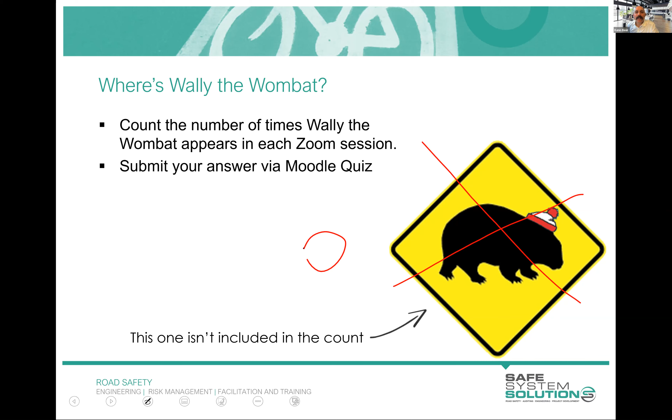Oh, sorry Max, go ahead. Oh yeah, I was just going to confirm for anyone thinking that maybe you can have this running in the background, and when you come to the quiz question you can just flick through your presentation notes that we provided on the USB - you won't find Wally in the presentation we provided you in the PDF. You only see Wally in today's presentation. So that's another way we've tried to make sure we keep people engaged. So make sure you're counting.

Thanks, Max. Yes, and another way we try to keep you engaged is by incentivizing you with chances to win prizes. We have lots of different prizes available if you're the first to answer questions correctly that we ask through the chat. If you ask really wonderful questions or make great comments through the chat, you're a chance to win a prize. Also, if you log into modules a little bit early, you're a chance to win a prize, because we do a little bit of trivia before each session, just in the few minutes before. So it incentivizes people to log in early, just some trivia.

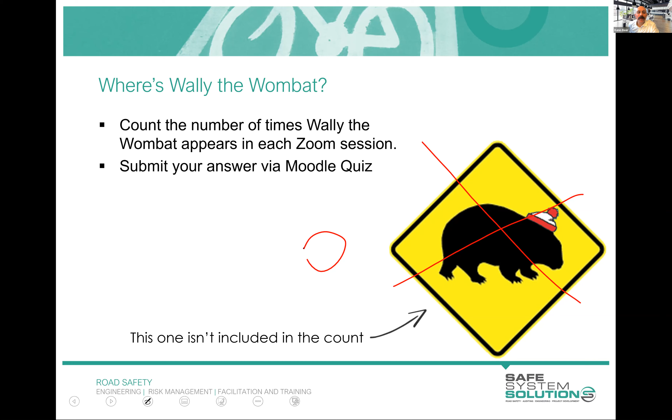And you might be asking yourself, well, how do I get these prizes? Well, at the end of the session, if you successfully complete everything, you'll get a certificate electronically, but you'll also get a certificate in the mail. And if you've collected any prizes along the way, in that pack will come whatever prizes you've won. The prizes are a whole variety of exciting things like socks and hammers - oh, we've stopped mailing hammers, they're too expensive to send - but all sorts of exciting stuff.

There is a competency benchmark for this course. We set a benchmark requirement, which is to attend and view all the sessions. We strongly encourage you to come to the live ones, complete all the set tasks, and the pass mark is 80%. But I wouldn't get too concerned about that, because both Max and I, our objective is to ensure your competency levels are up to that 80% pass mark, and we will help you and coach you one-on-one and do whatever's required to bring your competency level up to that.

You have 3 attempts at everything. I suggest what you do is have a first crack at it. If you really bomb out and don't do well, then get in contact with us and we'll organise a one-on-one Zoom chat or phone conversation.

At any point throughout the course, you are more than welcome to contact us via email or phone and ask questions about the assignment. We really do encourage that. That's the one big downside of not being face-to-face, it's harder for us to check in that you understand and you're comfortable with it. So please do reach out if you're confused at all. We are here to help you through this journey.

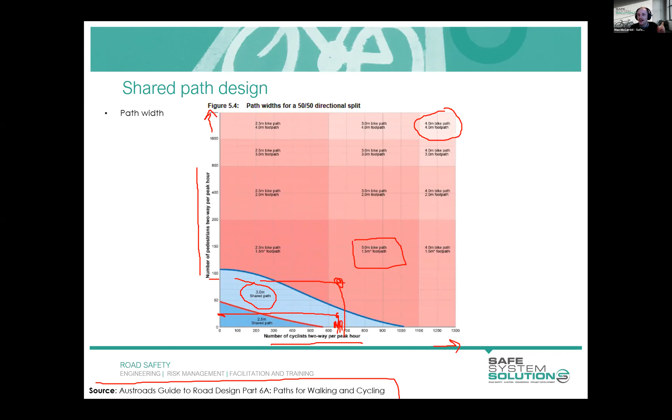As you're rising up the chart, as we're getting higher and higher ped numbers and cyclist numbers, what you're looking at is actually providing separate cyclist facilities and separate pedestrian facilities. Similar to that photo I showed in the last slide, where here's where the cyclists go, here's where the pedestrians go. If you've got high volumes of both road users within the space, then separating those two road users is considered best practice. That's the real takeaway from this graph.

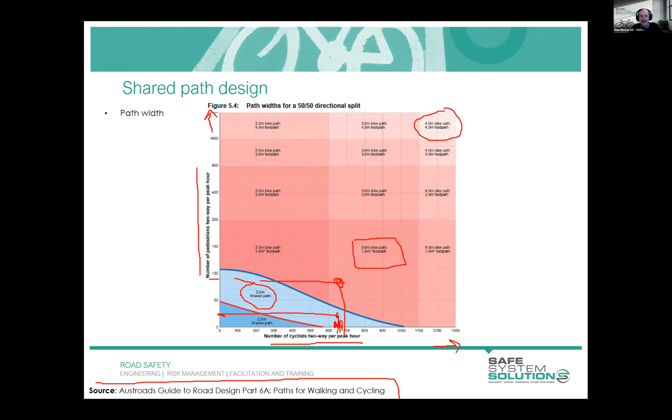You've got to take it with a grain of salt, a pinch of salt with these things, because they're trying to illustrate a point. But if you've got 701 cyclists per peak hour, does that shift things from a shared path to a separated facility? There will be some professional judgment required.

Another common way path widths are determined is in terms of the actual strategic function the cycling corridor is providing. For instance, if it's a local access path, shown here on the left-hand side, a range between 2 and 3 meters is suggested as appropriate.

These regional paths, also commonly referred to as commuter paths, have more of a let's-get-cyclists-here function. They're connecting corridors and connecting destinations. They typically have wider paths, so a range between 2.5 and 4 meters, with a desirable minimum width of 3 meters, which is generally the benchmark for shared use paths. You've got a lot more activity happening there with cyclists and to some extent pedestrians.

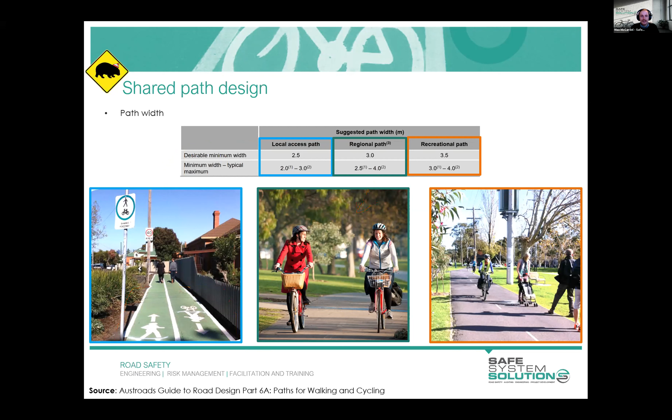Typically the first thing people consider with gradient is, if you're a cyclist like me and you don't like uphill gradients, this is probably the graph that's most relevant—desirable uphill gradients for ease of cycling. What it's saying is there are two curves: an acceptable level and a desirable level that can be provided within this space. As the gradient increases, the length of your gradient decreases, because you see that curve going down.

In other words, if you're providing a really steep incline, like a 10% incline, you only want to be doing that for about 10 meters before that facility is basically going to be unused, or only used by those that are incredibly fit and love doing this stuff—a bit of a mountain junkie. That's who will be most attracted to that shared path facility.

However, if you are providing shared paths, you're most likely catering for cyclists aged between 8 and 80—a common phrase I'll probably continue using throughout these modules. But if you're aiming for cyclists within that range, their ability to tackle these really steep gradients is very, very limited. So that's what this graph is trying to illustrate.

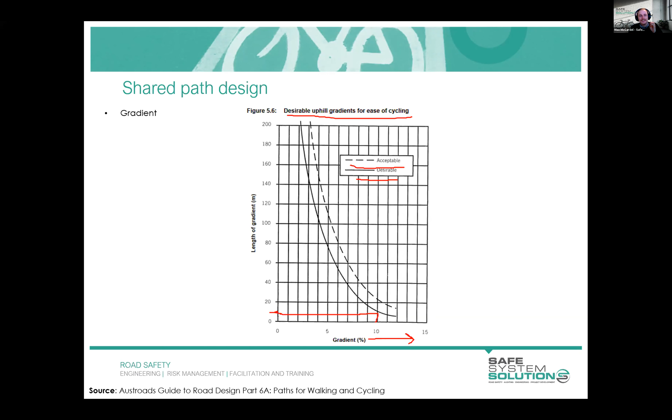Another interesting facet about gradient is in reverse. When we talk about downhill, which isn't always considered as intrinsically as uphill—because uphill you can understand why that's more challenging for a cyclist to pedal up—downhill gradients typically steeper than 5% should not be provided unless it's unavoidable, as the phrase is used in the Austroads guide.

So the issue with this downhill gradient is you, as a cyclist—and I'm sure anyone that's been on the saddle would love to just go for it down this hill—will easily reach 40, 50 kilometers per hour by the bottom, and that's without pedaling, just enjoying good old fashioned gravity doing its work. But the issue is with a cyclist coming in at that crossing point, interacting with the shared path: their ability to see you coming down that hill, and your ability to see them entering your shared path, is incredibly limited.

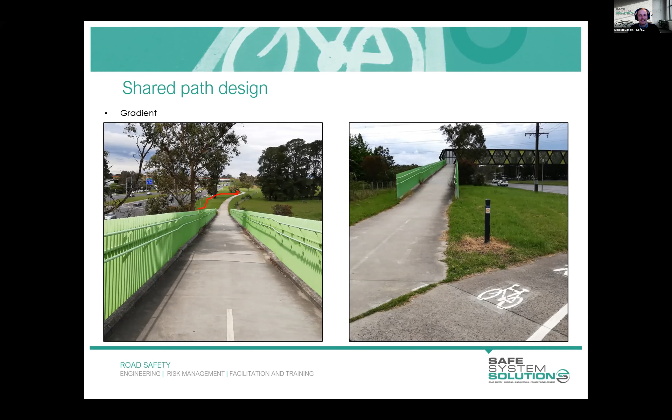I'll keep hopping through. Are there any other questions there, Ken? No, that's it for now, but do keep them coming in, everybody, please.

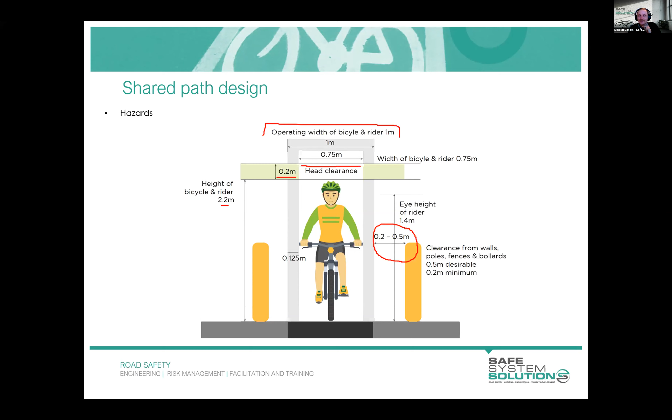Sorry, Ken, yeah, go for it. Oh no, I was just going to say, speaking of mountain bikes there, Andy's just popped in the sort of different widths of handlebars of different bikes. Certainly some mountain bikes have quite wide handlebars, and I ride a very compact handlebar setup on my bike. So those widths, they're sort of taking into account a bit of that range, are they?

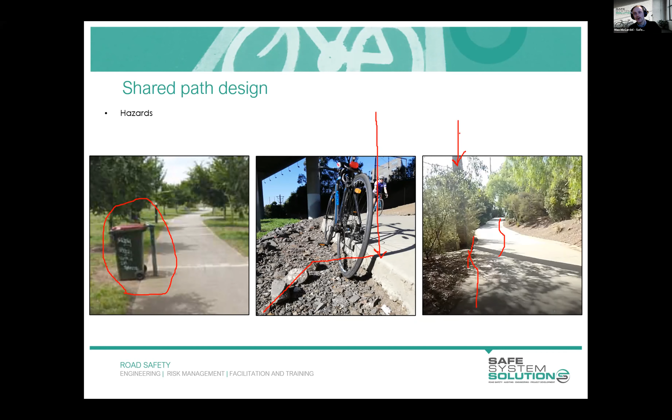Although you can see it, and if I point it out you'd think how could a cyclist ever hit that, there are plenty of instances where you as a cyclist are forced to weave in and out or undertake emergency swerving. So it does happen. Here's an example of what this delineation could look like to avoid a hazard.

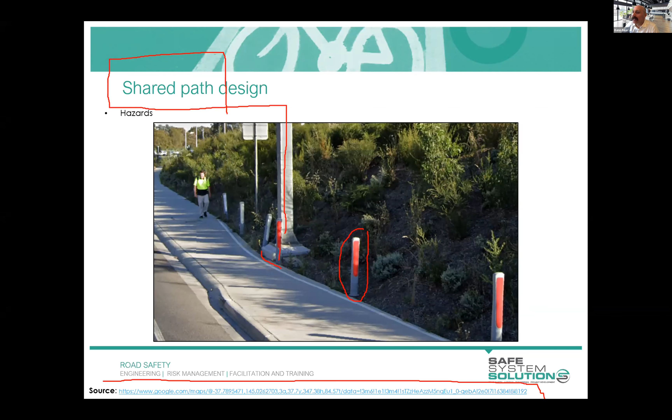What do we got coming in now? I think we need some sort of barrier system potentially, lots of stuff coming in now to redirect cyclists away from the hazard, especially if they're out of control or avoiding something. So potentially some approved cycle fencing. Can the gantry base be protected? It wouldn't stop them hitting it, but maybe reduce the severity, so some cushioning there.

I'm just reading. Maybe make some comments on those, and I'll keep reading other ones, because this group is excellent, Max. Lots of ideas and thoughts coming in. I'm struggling to keep up with my reading.

I love it. It's good to hear the use of the term cycle-friendly fencing. We will discuss that later on in this presentation. Good to hear that jargon's already been embedded in some of the participants here, because that's certainly an option within this space. If rather than just providing flexible bollards, you provide some type of fencing there, you're more likely to hit the fence, which has got a much improved crash outcome. You hopefully just slide against the fence and continue on your journey, rather than hitting that fixed column, which would hurt a lot if you were to run into that.

So any other answers there, Ken? Well, yeah, a few good thought-provoking comments, which I really like here. So one from Sam talking about the people designing, building, maintaining, managing, and doing the temporary traffic management, everything like that - have they actually ridden this? Are they people who ride and understand some of these challenges? And if they did, they might alter their thinking. So that's a good one.

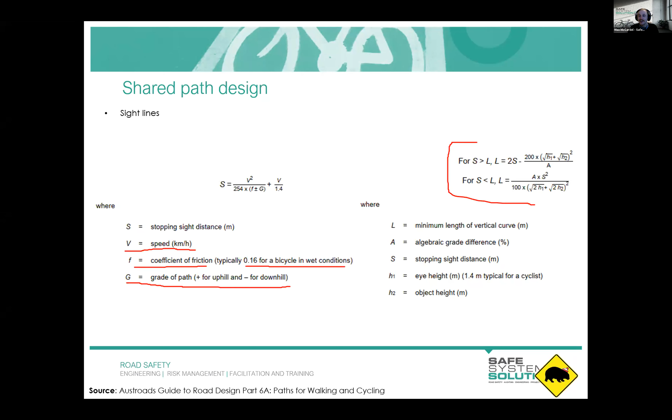There's also more equations here if you want to get into some finer details of whether you'll be able to stop if you sight that hazard in time, or whether you're going to collide with it. So there's plenty of research out there if you're interested in seeing whether what you're proposing is going to be a hazard to the cyclist, or whether there's sufficient sighting distance.

The one I wanted to discuss is horizontal curves, because it's not always thought about in this space. A really common example is providing vegetation at the side of the shared path. But if you're providing that along a curve, that vegetation can grow in size over the years, and it can be a real hazard for cyclists because you already can't see beyond the curve, and you're introducing this bushy obstruction that blocks your line of sight. You're potentially creating a point in the future where cyclists can't see, and if there's a hazard there, that could be an issue.

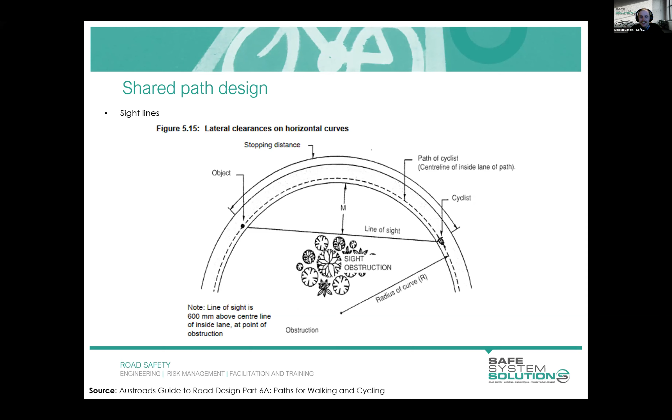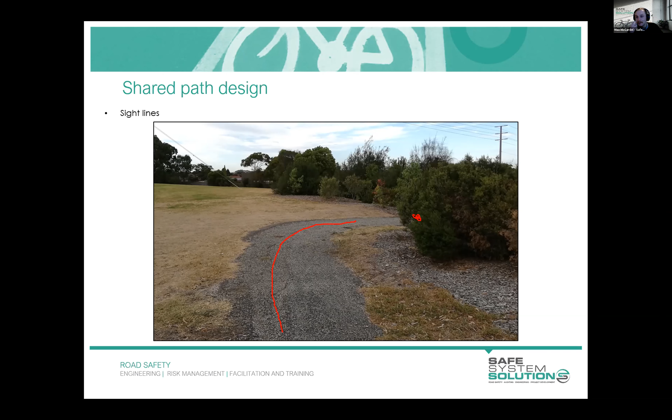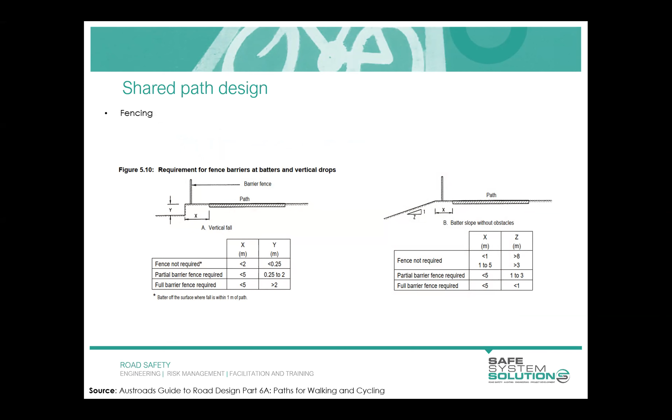Okay, fencing. We've chatted about it already, and it's good to hear the cycle-friendly fencing being brought up. There are some requirements for when fencing is considered necessary, and I'll run through those. There are two types of examples that they run through within the Austroads Guide - one being where there's an actual vertical drop, shown in this first figure here.

Running through this table, a fence is not required where X is less than 2 - in other words, the edge of the path to the drop is less than 2 meters - and Y is less than 250 mil. The reason they say the fence is not required in that space is shown by the asterisk: it says to batter off the surface where the fall is within 1 meter of the path. In other words, instead of providing a fence, provide this kind of batter using soil or any natural gravel you've got around the area, providing this kind of ramp instead, because that's a better outcome for cyclists.

However, where the drop is larger, between 250 mil and 2 meters, a partial barrier fence is required. And if it's greater than 2 meters, a full barrier fence is required. I'll hop into some examples of what those fence types look like.

I'll jump into the other example where we're actually looking at the slope. That first example was about the drop adjacent to the shared path. But if you could imagine you've got a cliff adjacent to your shared path, you'd also want to provide a cycle fence there, because you don't want cyclists to come off and down the cliff - that would not be a fantastic outcome.

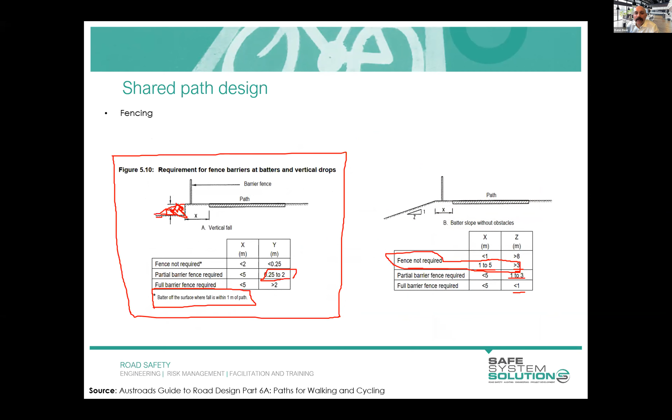Yes, no, good there, and it sort of reinforces why you want different people auditing, independent eyes or different eyes looking at things. Because Max, you're focused obviously on the type of fence and not thinking wider there. The fence appears to be designed for adults. What about smaller cyclists, kids? Is there any consideration of that within the cyclist-friendly fencing standards that you're aware of, Max?

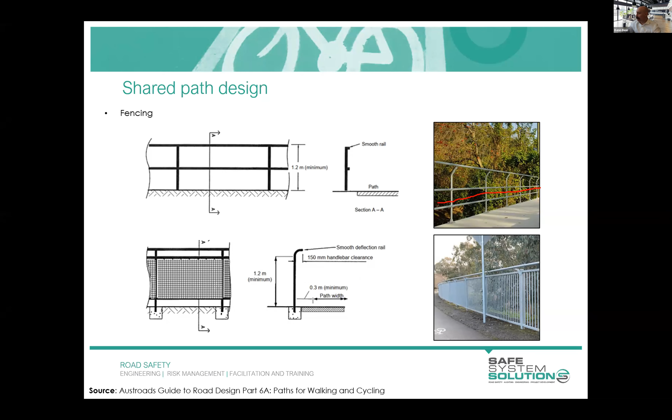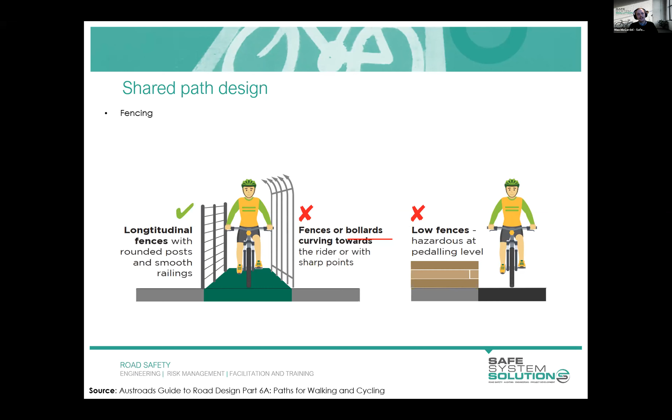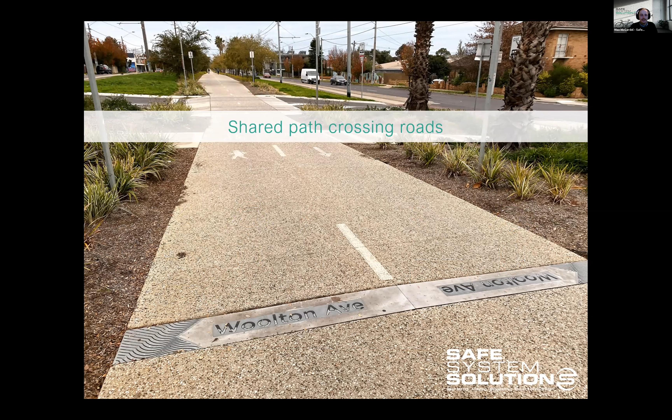Okay, shared paths crossing roads. I've got this photo here of an example of a shared path crossing the road. I'll just shift this title down a little bit so we've got a clearer picture there.

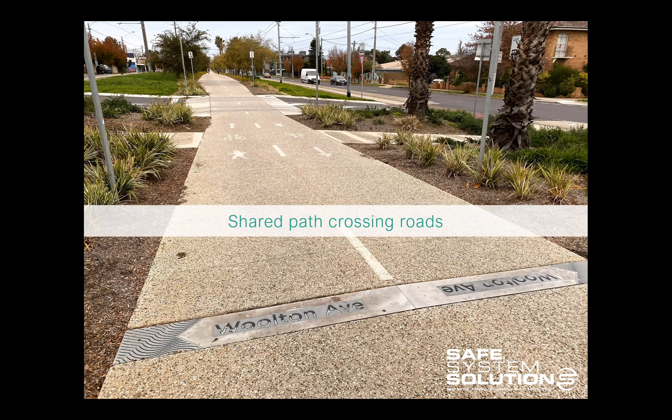And Ken, is it possible if we could launch a poll? Because I've got a question for the group that I'd like to ask. Yep, poll coming up live now. You're not being marked on this, everybody, it's just to get your engagement, your thoughts. The question I'd like everyone to consider is: should fencing be installed along this shared path? Considering all that conversation we just had about whether there's a drop-off adjacent to the shared path, or a significant batter that we should be concerned about, do you think fencing should be installed along this shared path? So have a think about it, have a look at the photo.

This one used to be on my commute to work before the whole lockdown situation occurred. What's that, St. George's Road, is it? St. George's Road, that's correct. Yeah, that's a good one. I like the fact that they've got that bike counter down the end there, showing how many bikes have gone through in the day. It's very nice. We've got everybody who has had a vote, so wonderful there.

And I'm going to share the results there. Fabulous, okay, so I'm seeing that 96%, the majority are saying no, and I would tend to agree that fencing probably isn't required within this instance. You're most likely to collide with some low-level vegetation, which is probably going to have a fairly negligible effect for a cyclist within that space. And falling onto tan bark or grass is probably not the worst outcome, albeit there are some signposts which could be more significant if you were to collide with that. But I think generally within this space, this is probably an instance where you wouldn't really require cycle fencing unless there was a particular risk noted by the community or by particular users within that space.

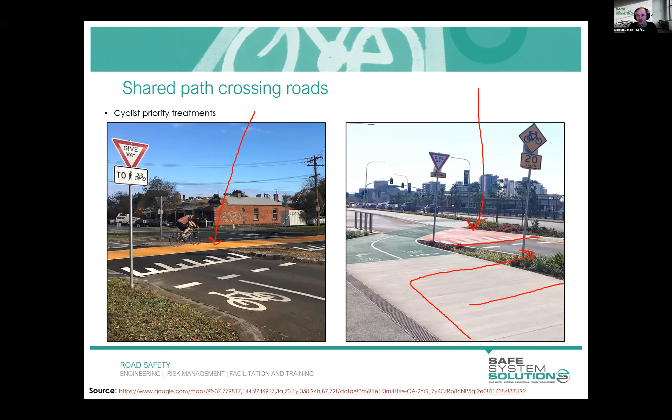At the moment, for shared paths crossing within slip lanes and this type of environment within Victoria, there's guidance stating it should be yellow. For Brisbane, red for the raised part of the Wombat crossing is fairly common that I've seen. Using green throughout the cycling conflict points is also, I'd say, nationwide considered the most appropriate. Where you've got conflict points between where a cyclist and general traffic could collide, that's generally painted green. So yeah, there's plenty of options out there.

Some practical implications of cyclists being able to go across zebras is they need to be assessed for sight lines, because of the difference in speed on the approach of cyclists compared to pedestrians, and whether they've been designed in accordance with that, which I think is a very good point. So you need to do some risk assessing around that.

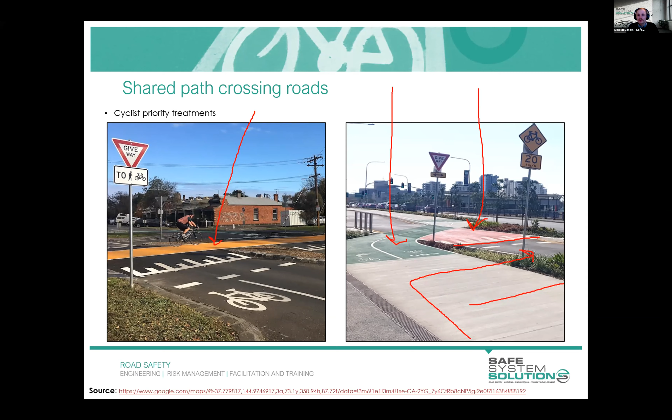A few other comments have come in. I think I might let you keep going, and I'll answer a few in the background or make comments, but do keep them coming in and share them with everybody. I think there's a great discussion in the chat going on. Good to hear we've got such a vocal, energized group, Ken. Loving to hear it all.

I'll hop into bollards now, which are unfortunately quite a common feature on our shared paths and cycling corridor network. I'm not going to say we need to get rid of all of them, as if they're too much of a hazard that must be completely eliminated. I'll just start by saying we should reflect on exactly where we are installing these bollards, because there's plenty I've seen around where I think there's no way general traffic could access this particular route.

So it leads me to assume that they've installed this bollard for maintenance vehicles, perhaps picking up bins within that area. And I think a better outcome would be ensuring that you're having a conversation with your maintenance companies so that they're not accessing the shared path, rather than putting a bollard, which is a fixed hazard for cyclists every day of the week, as opposed to that once a week, one vehicle that happens to use that space. So I suppose as a point of reference, I tend to start and think, okay, is the bollard actually required within this space, or are there other means that we can perhaps mitigate that risk? So anyway, I tend to get a bit passionate about this, so sorry.

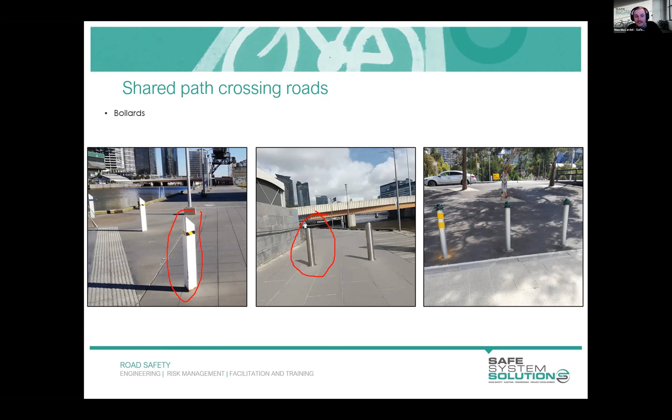But there's a few examples of different bollards that we've got here. This is just painted white with a little bit of hazard tape. That's not going to do a lot in low light conditions. We've got these silver ones that blend in perfectly with the adjacent bluestone pavement, which is also not fantastic, because you've got a bollard, which is a hazard for cyclists. You really want to make it as clear as possible that that hazard is there. So that's not a good example at all.

And yeah, I suppose in all these daytime conditions, fairly obvious, you can see them, but you could also imagine if it was low light, or perhaps there's a cyclist in front of you that is blocking sight lines of that particular hazard, and you can't see it, and you decide to overtake that cyclist, and next thing you know, you're colliding into a bollard. So it's not a fantastic experience. It's something that can clip your pedal, something that can clip your front tire, and would likely result in you falling off your bicycle. So the reason I talk about it, oops, sorry.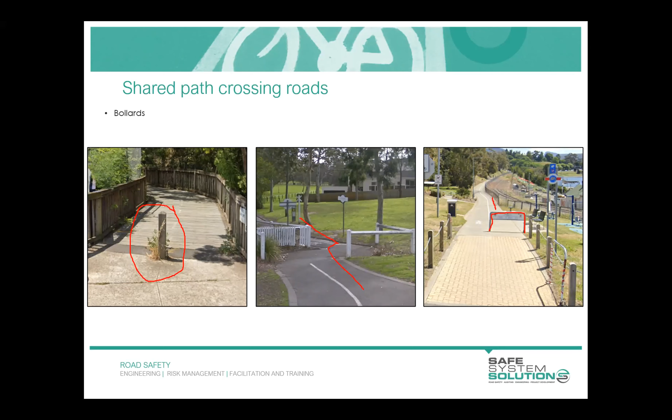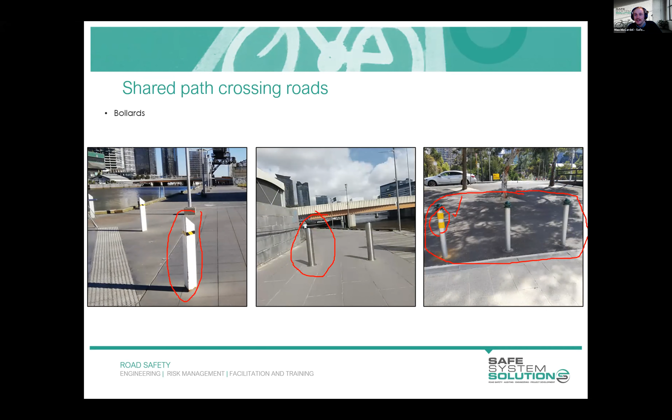What speed are we expecting cyclists to be travelling in these areas? And maybe the page before also referred to this. What sort of speed do you think cyclists travel at? Yeah, so within this space, within shared paths, I think it's safe to assume cyclists can go to speeds of 20 to 30 kilometres per hour. If you're a commuter cyclist, that sounds probably a little bit slow. Maybe you're travelling a little bit faster if you're on road facilities, but generally those speeds are not too challenging to hit. And if you were hitting a fixed hazard at 30 kilometres per hour, you can certainly know that you will feel that, as well as any of the following crashes that may occur, which I'll hop into now.

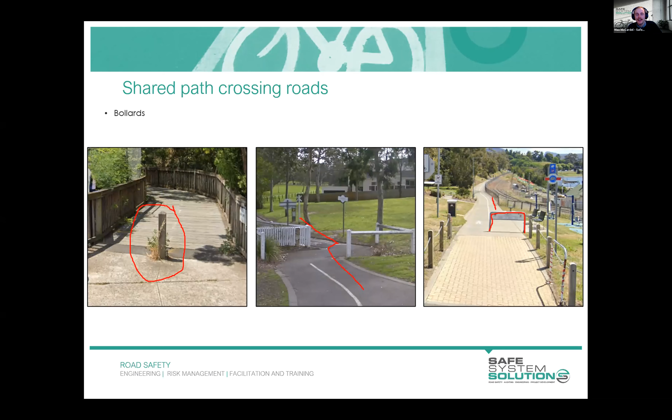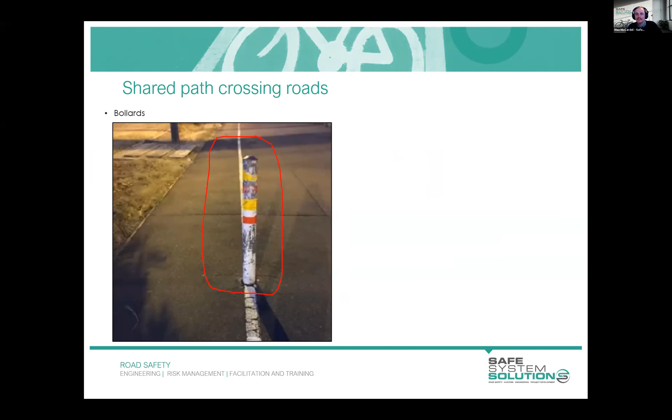Because I've actually got an example here of a bollard that was installed on a very, very popular commuter cycling route in Melbourne, which is this bollard here. You can see it's certainly been struck several times, and it's not doing the best job of being seen and being conspicuous. And this is what it looked like after this gentleman here actually crashed into it. So the council went out there, they gave it a fresh paint job. You can see the spray paint markings there on the ground, and they also put some new reflective tape on it.

So while we're on the topic, well, what can we actually do?

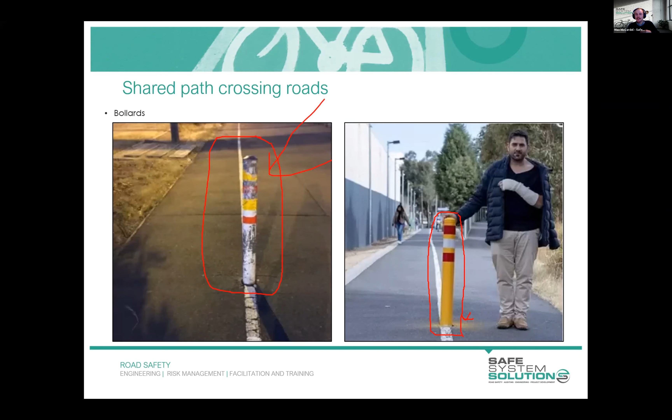So I've got to say, these treatments are not that common. The bollard is certainly the predominant way to address this.

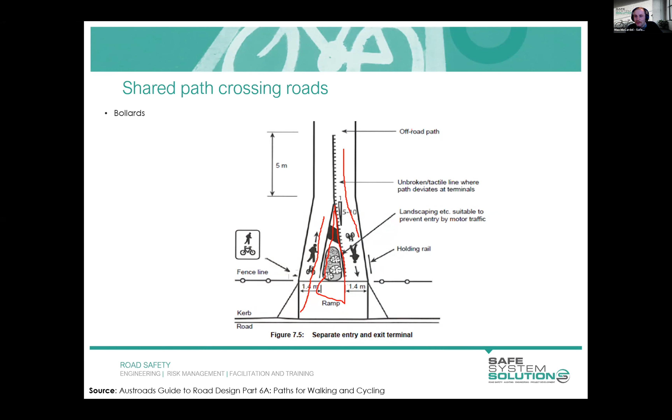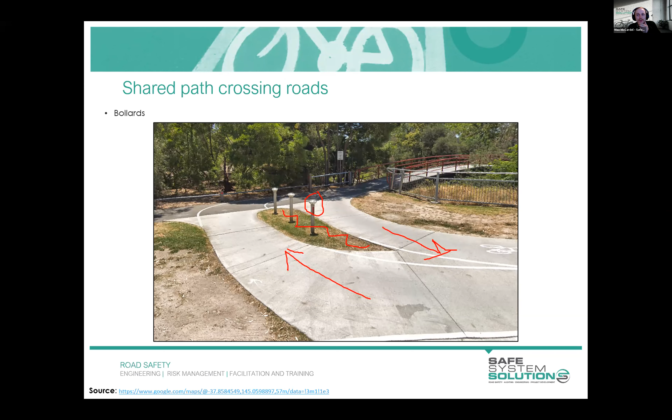DDA requirements, as was discussed earlier on - we do have a requirement to include tactile ground surface indicators. They may need to be installed on the footpath where the bicycle path has priority, to comply with the DDA Act. So those TGSIs, for those familiar, the little tactile ground indicators, we do see them as being required. In that example before that someone picked up, they should have been installed across the priority crossing there - I would agree, and I think we should be installing them for our DDA community. Very good pickup.

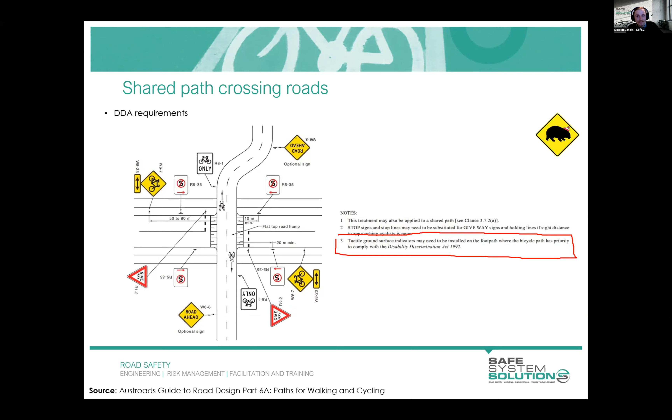We've got a bit of discussion about speed zoning bike areas, and I'm making comment that that's sort of a last resort if you can avoid it, because some cyclists are going to go fast. Bit of discussion about enforcement of those sort of things, and Irene rightly pointing out there has been some enforcement in the Docklands area, and also South Bank area. I know there's been enforcement of that.

So we've got some answers here on this one - no clear right of way, no right of way, so Dan's popped that in. No wayfinding, priority issues, no wayfinding. So generally along those lines. You want to give any prizes away there? I think that's all spot on, Ken. Maybe to the first person that commented on wayfinding, because that is certainly going to be the next topic we're discussing here.

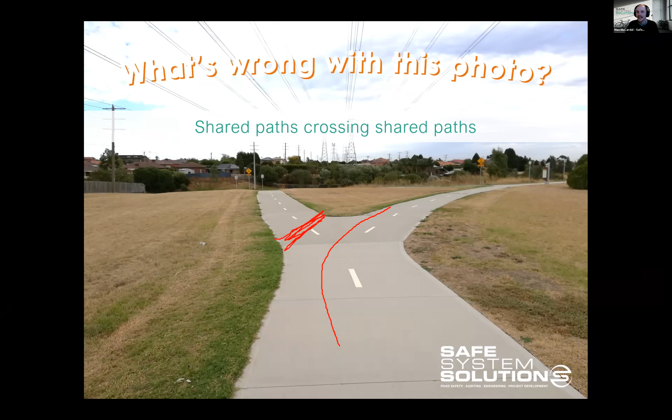But yes, certainly assigning a priority, so determining which is the priority movement here. Perhaps it's cyclists traveling to the right-hand side in this instance, and then creating some kind of stop or give way treatment, so one leg has the right of way and it's not just a free for all. So, yep, Dan, Jesse getting prizes there, and lots of support for that - that is good, thank you. Fantastic, yeah, and plenty of others got in there, they just weren't as quick.

You can see this general fork arrangement - it does not communicate to cyclists who should be giving way to who, and what will end up happening is cyclists just go through and hope for the best, all relying on the other cyclists to give way, which is not a good outcome. So instead, clearly articulating who should be giving way to who within that space is certainly a good way to go about it.

But, sorry, I got something of my own.

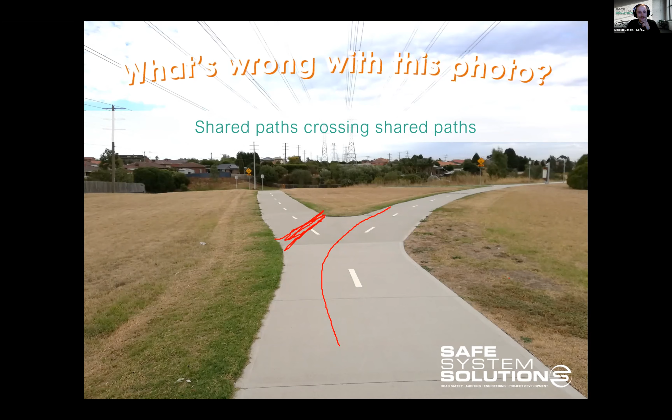Providing wayfinding within this space, as I touched on earlier in this module, is incredibly essential and something that's really overlooked on Australian cycling corridors, I've certainly noted. It's so important that Austroads have actually done a separate report on bicycle wayfinding, which you can flick through for ideas. The important thing is highlighting key destinations, like this way to the train station or the shopping centre, highlighting key generators where cyclists would likely be travelling, as well as communicating to cyclists that they're staying on the route they started on.

So in an instance where the route forks off, perhaps one path is a creek trail and the other a rail trail, you need clear indication as cyclists approach that intersection - this is where you go for the creek, this is where you go for the rail. You don't want a situation where they've gone halfway down the creek trail and realise, oh, I meant to see a train station, and have to go back and do it all again. It's about communicating that early on to limit frustration and improve the connectivity of the cyclist's journey.

Having cyclists gunning through there at 20 to 30 kilometre speeds, you don't really want pedestrians walking over within that space. So they've provided a splitter island and give way markings, just trying to articulate that there are pedestrians crossing within that space, which probably has some effect. I've also seen this kind of pavement marking to reiterate to cyclists to slow down where there's pedestrians crossing, but it's probably not going to be the be-all and end-all - it's one way of communicating it.

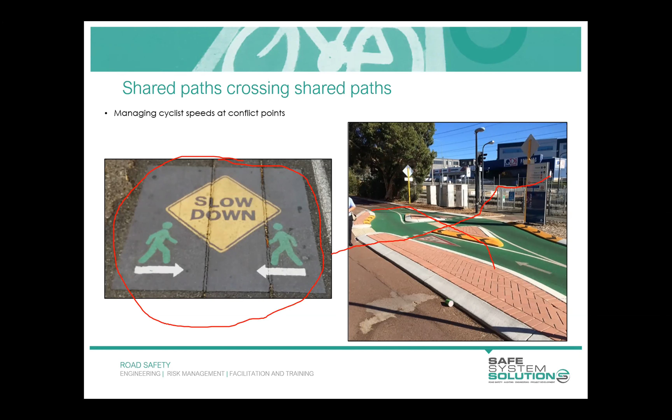Another, perhaps more effective method would be to raise the pedestrian crossing point, which would physically slow down cyclists. Would you recommend a different colour there for the pedestrian path, to warn that cyclists could be there? I'm one of those practitioners that tends to vote for colour changes - I think colours do a really good job of articulating that something's changing, that there's a hazard or something you need to be aware of. So yes, I could certainly see that working within this space to get people's attention.

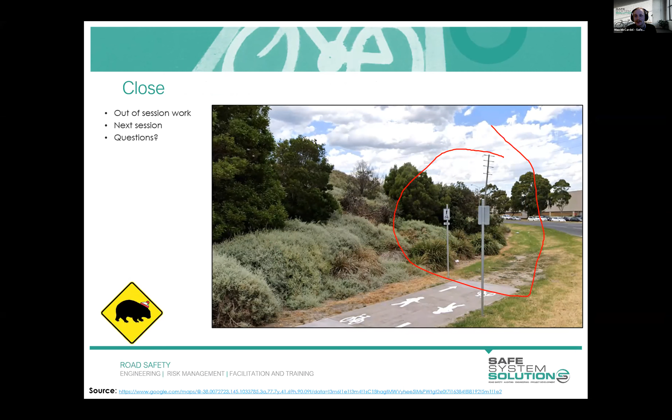Ken's already taken control. That was impressive. I didn't have to do anything. That's it, Max. No time to spare here.

There's other questions and things that have popped up, and we didn't get quite to everybody. Maybe Max, you can read that one from Irene. Wade's made some good points about safe system speeds and the vulnerability of cyclists hitting objects, which is a great thought starter, trying to bring it back to biomechanical tolerable energies of force, and also commenting on where you've got some of those route signages.